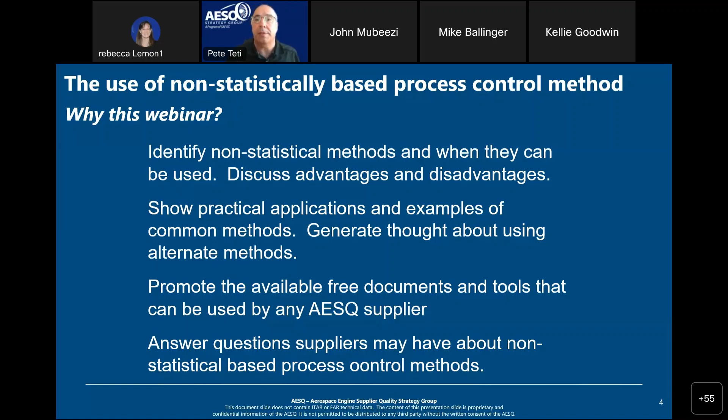RM13006 is the main subject here, and this discussion comes directly from that reference manual. When we put that together, it was a strategic decision not to make process control methods all based on just statistical methods, but also non-statistical methods, in particular poka-yoke, the Japanese word for mistake proofing. We'll be featuring that along with a few other techniques. So we want to raise the overall capability within our supply chain to understand how to drive the use of these process control methods as a way to mitigate high risk from a PFMEA, and how to write better reaction plans on your control plan. So control methods and the reaction plans go hand in hand together.

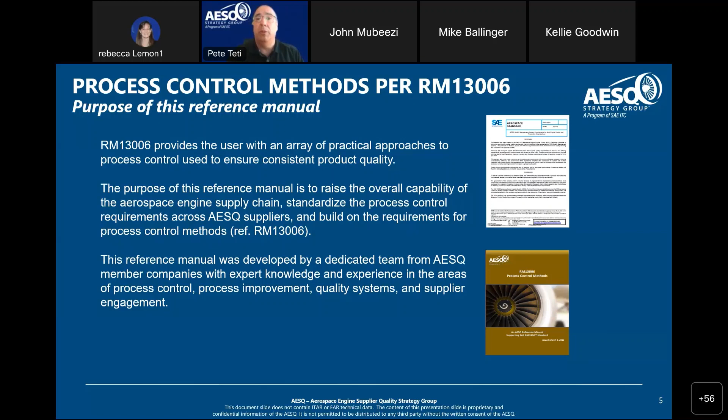Now, the reference manual was developed by a dedicated team of process control professionals that worked several years in compiling this excellent information. And along with this reference manual are many others available for free on the AESQ supplemental page website.

So what is the subject matter interest group? This is a group, as mentioned, of process control experts. We get involved in the AS13100 content when it involves process control. Reference manual content, we own that. We're in the process of looking at ways to improve that reference manual right now. So we get together on a regular basis. Every month we meet and we go over changes to the reference manual, webinar subjects, and what we could do to help the supply chain in this area. There is a community of practice that we sponsor on LinkedIn, where you can go on and ask questions and we can get back to you with answers.

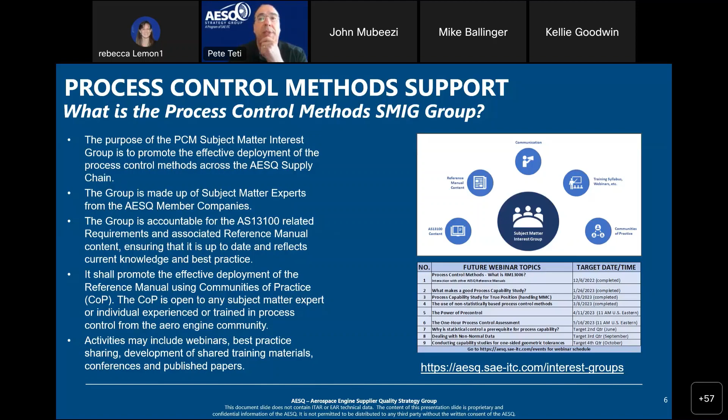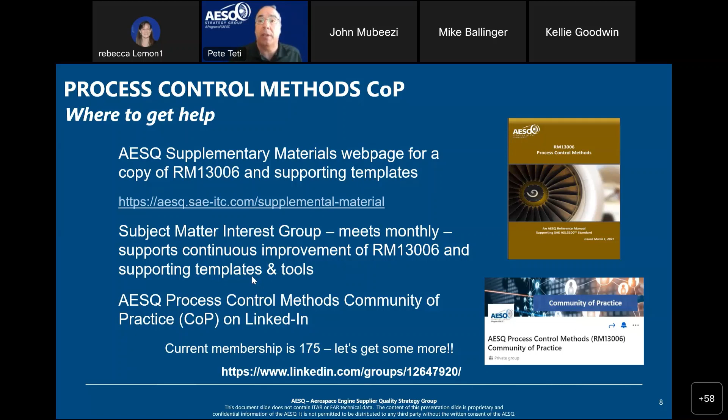So now we're going to take a walk through non-statistical process control methods. A lot of this is directly out of the reference manual with some supplemental visuals to help enhance the learning. So let's give an overview of the recognized control methods. What's error proofing or mistake proofing all about? Run charts with non-statistical limits, life usage techniques, visual process check and checklist, first piece check, and test piece evaluation.

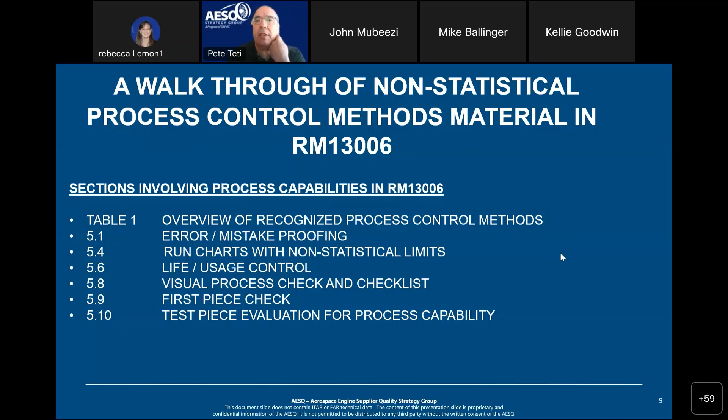I see my cohort in crime is now on, Paul Gorg. So he must have managed the technical difficulties. So I'm going to turn it over to him after this particular slide.

So what is process control? We've defined it here to be very strategic. And again, overall, a broad definition is the strategy employed to reduce and mitigate product and process risk. So it's something that results out of a design or process FMEA. Those are the tools to identify risks and also the control methods to help mitigate those risks.

Process control includes here the use of statistical and non-statistical methods. Again, these are to work to prevent and detect errors. And we know from design and process FMEA, the way it's structured, the columns are there for prevention-based controls and detection-based controls. We're going to key in on the prevention-based today. We'll talk a little bit about detection as well, but the initial discussion will be on error proofing, which is more driven towards the prevention.

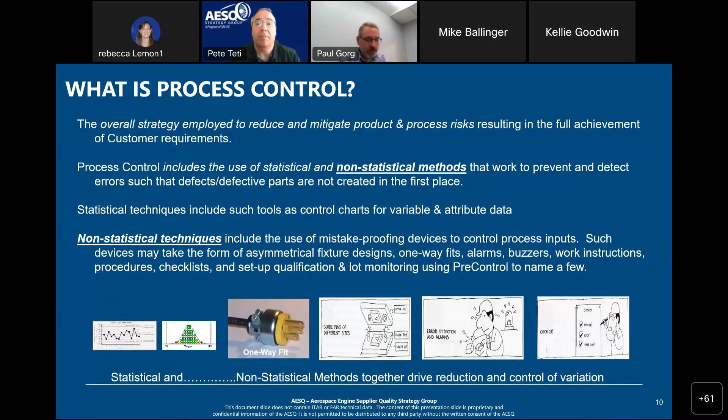All right. So we wanted to reference some of the materials that are out there. There's a lot of information on mistake proofing out there. What we're going to talk about is why non-statistical methods, when they're applicable to use, and then go through some methods and some examples. Poka-yoke, everybody's kind of familiar with that name, or mistake proofing or error proofing goes by a lot of different names, but it's not the only thing we're going to talk about today. But you can use this as a reference material and where to find it.

The goal is basically to prevent the cause of the failures and the defects. So that's what we're trying to do. Okay.

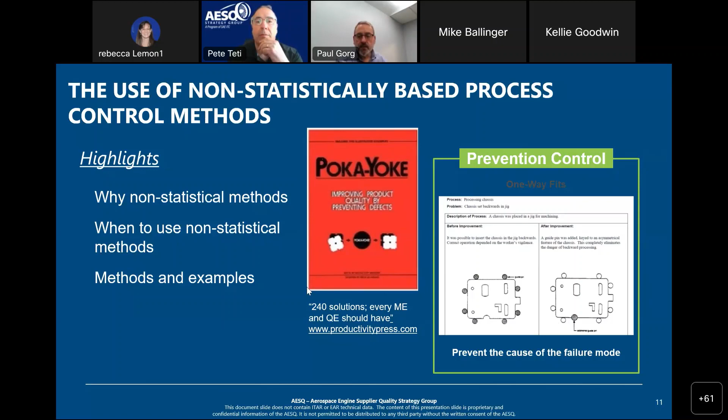So when to use process. First of all, when the process can be error or mistake proofed, when the elimination of the actual defect is possible. If the process does not easily lend itself to statistical methods, either the data is not normal, we'll have to go through transformations and all that kind of stuff, then it could be difficult to use statistical methods.

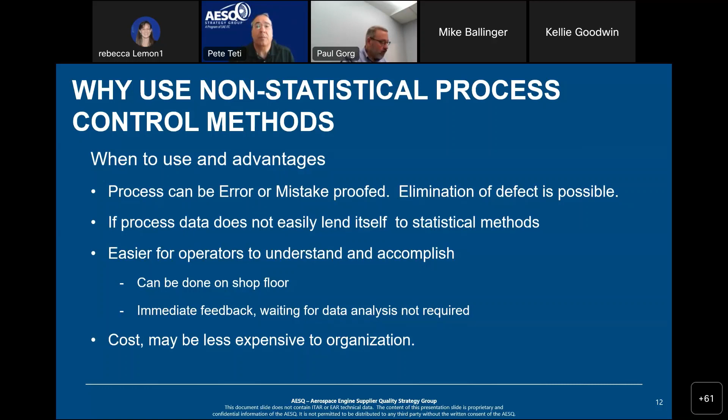The other advantage is it's easier for operators to understand and accomplish; it can be done on the shop floor. And the other advantage of it is to give you immediate feedback at the operation where you're doing it. You don't necessarily have to wait for data analysis, and it may be less expensive to the organization overall to accomplish. So it can be simple and fairly easy to understand.

When not to use: you may be in a situation where your process data is easily attainable. You have a nice normal process, it's easily collected, then probably your statistical methods may well be the way you want to go. Non-statistical methods are not going to give you process capability metrics if they're needed for the customer or organizational requirements. It's not going to give you a CP or CPK. You're not necessarily going to have that type of data if it's necessary.

And my typo is still there.

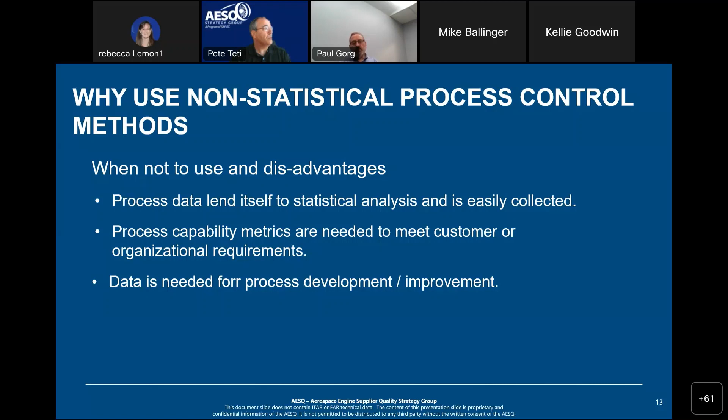Data is needed for process development and improvement. So in a lot of cases, the non-statistical methods are going to be more accept, reject, go, no go. So if you have a need for incremental data to look at process development and process improvement, it may well not serve that purpose. Next.

So this is basically showing that all this flows, right? The key goal of the process control is to help mitigate risk. Non-statistical methods such as mistake proofing are applied for the highest PFMEA risks. And what we're trying to make clear here is, you do your PFMEA, you generate your control plan. The control plan is based on your highest risk items from that PFMEA. And in a perfect world, your mistake proofing would be applied to your highest risk, meaning how do we eliminate the number one highest risk on that PFMEA from occurring?

Second would be SPC. Third would be, okay, let's inspect it, set targets. Fourth would be audit. Those might be acceptable for lower risk, but the higher the risk on the PFMEA and into your control plan, the more you want to try to generate something that actually stops it from happening. Like I mentioned in the first slide, there's a lot of different ways you can do this, and a lot of it is dependent on your process and what you're making, but the goal is to use your ingenuity, use your ideas, use your teams, figure out what can be applied, but to eliminate the defects 100% of the time.

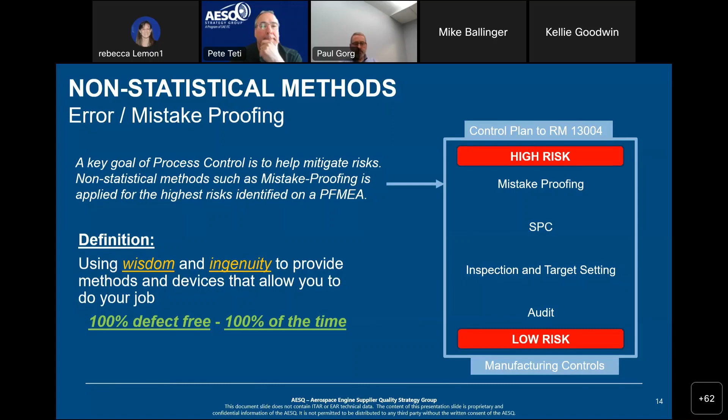So it's a little interesting in that there's two aspects of this. One is there's error or mistake proofing, but an error doesn't necessarily mean a defect, but the goal of the mistake proofing at the highest level is to eliminate that error, to make sure that error can't happen. So why does it happen? Forgetfulness, misunderstanding, lack of experience or skills. We're dealing with a lot of new people in our industry right now, a lot of training, lack of standards, trying to get things out fast, malicious intent, but that's extremely rare, and errors that lead to defects. Defects are not always inevitable, but can be eliminated by use of simple low-cost methods.

So mistake proofing is best applied where there's repetitive tasks that depend on somebody doing the same thing every time, remembering to do something. Those are more applicable areas for it. Ed?

So just a little credit to the father of it, this gentleman, Mr. Shingo, who's attributed to developing the method. Originally called, we've all heard it over the years, idiot proofing, but decided that was potentially offensive, so changed it to poka-yoke, which is to avoid inadvertent errors. And the target of it, and why we want to do it, is to eliminate QC inspection, to reduce costs, basically to make sure that you've eliminated the potential to even have the defect, so you don't even have to inspect for it. Go ahead.

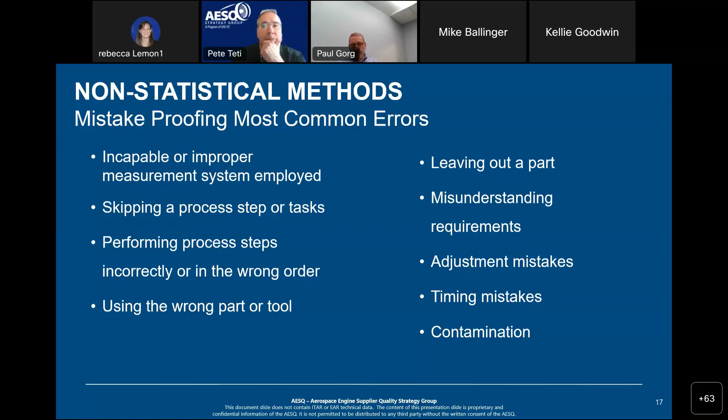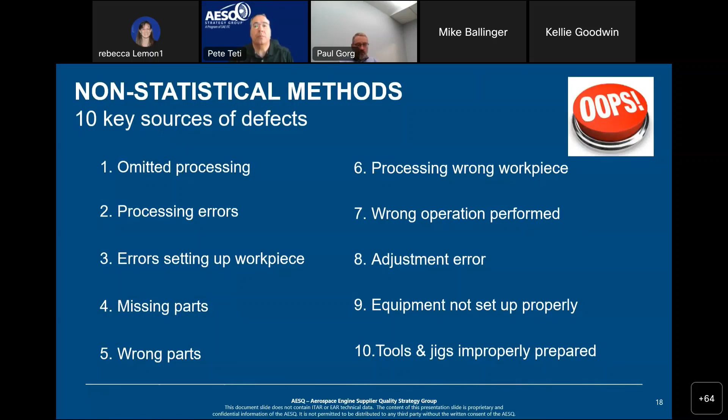So defects: omitted processing, errors setting up a workpiece, missing parts, wrong parts. You guys can read through the list, but these are the product defects. And again, sometimes the mistakes won't generate a defect, but sometimes they will. And if we can eliminate the error, or the mistake, then we're going to eliminate the defect. And again, we'll go into more levels on this next.

So error proofing can take 4 forms, and this is kind of a hierarchy. The best one is elimination, to design the product or process in such a way that an error is not possible, that you can't make the mistake. The second one is control, and you may not be able to stop the error from occurring, but you can make sure that it doesn't move any further through the process and that the defect is going to be 100% detected. Not quite as good because it doesn't actually eliminate the error from being made necessarily, but it will eliminate the defect from moving forward.

Number 3 is provide a warning signal. So it detects the defect or error and gives an operator warning. It doesn't necessarily stop it from happening, but it does give you the ability to deal with that and fix the situation. Facilitation is worse, and we're familiar with those. Those are work instructions and procedures and guidance, trying to increase the likelihood that we will catch the defect or the mistake before it turns into something worse.

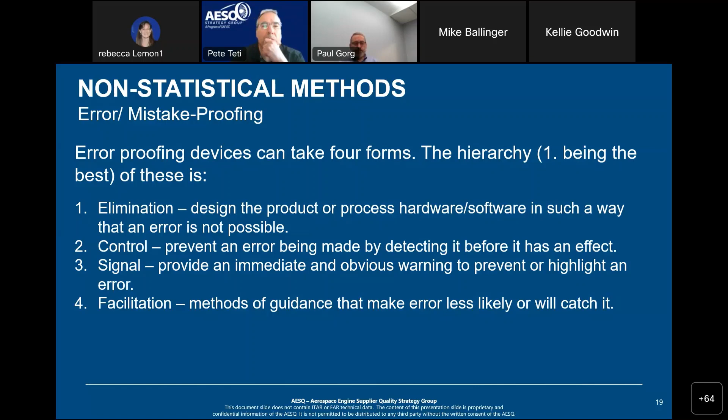And again, this is just another way to look at it, but the best one is level 1, which eliminates the mistake and defect from occurring at the source. So an example over there is the plug that you've all seen with the bigger tang and the smaller tang to make sure it only goes into the socket one way and guarantees polarity. Level 2 is mistakes are going to be detected. They're going to be determined and found, alerting the operator. Method 3 detects it and stops it from further processing.

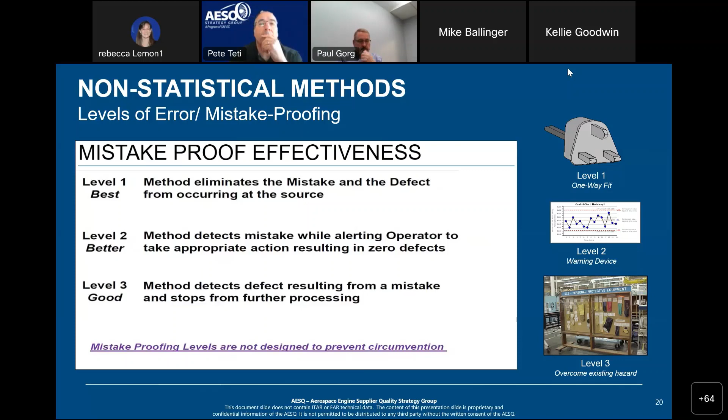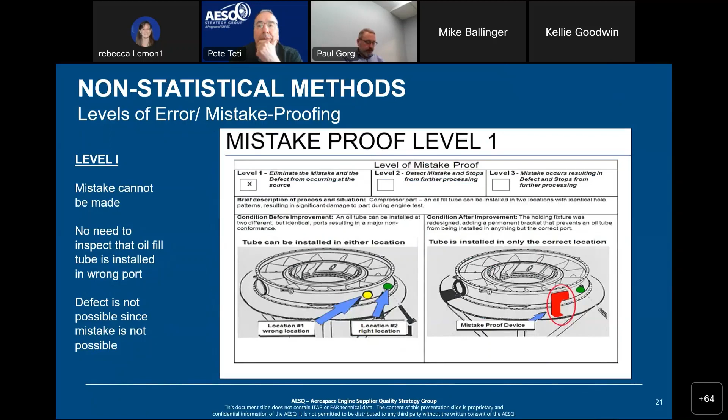The defect, again, is not possible. It can't be done with this type of situation. So this is a level 1. This is where we want to end up if at all possible. And with this, nobody has to worry about inspecting it or looking for it. It's guaranteed. The next example is kind of a level 2.

So in the example here, there's one screw that needs to be installed which is a different size than the rest because of the cutout at the bottom. The screw can still be put in, so the error could be made, and they could put the wrong screw in that slot. But the error proofing on level 2 is that if they put it in the wrong spot, the screw will not go in and will be exposed, noticeable, clear to the operator. So it doesn't necessarily fix the initial error, but it does fix the defect and make sure it will be obvious and visible and not be able to be moved forward. So this is a level 2.

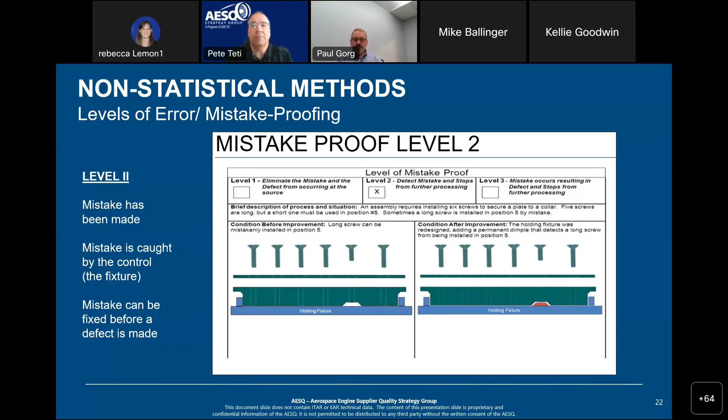And level 3 is, again, the mistake can be made and the defect can be made, but the jig itself is basically an inspection method that is going to tell the operator whether that defect was made. So it doesn't stop the mistake, it doesn't stop the defect, but it contains it, keeps it from moving forward, because that non-pierced part can't go through that pin. So it accomplishes the goal of not letting the part go forward. However, it does not eliminate the error or the defect. So still a good thing, but not the best.

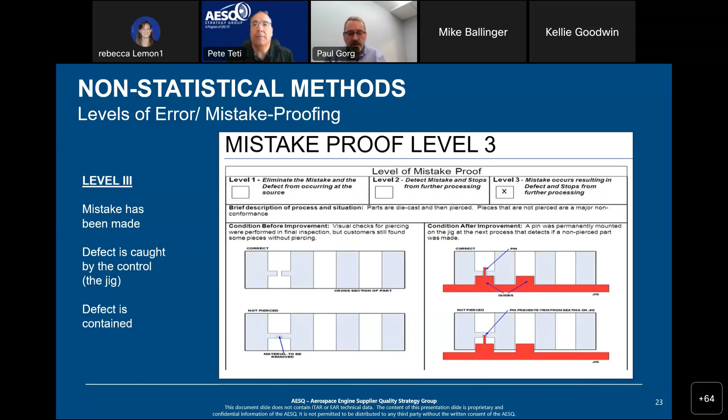So these are just some additional examples. A lot of us have dealt with fixtures and tooling where we put in different size guide pins, put in diamond pins, a diamond and a round and things like that, so the things just can't be assembled together incorrectly. They won't fit.

We have alarms that either light or sound or, in the best cases, actually shut down the machine if something is not within parameters, limit switches, so that the tooling is lined up. There's a lot of things here.

Lower level mistake proofing is going to be a checklist that's got to be signed off. And we'll go more into checklists later. But it's got to be signed off, got to be acknowledged. In the best case on checklists, there's two people looking at it, so you've got a double check. Anyway, I think most people have examples in their business of other methods.

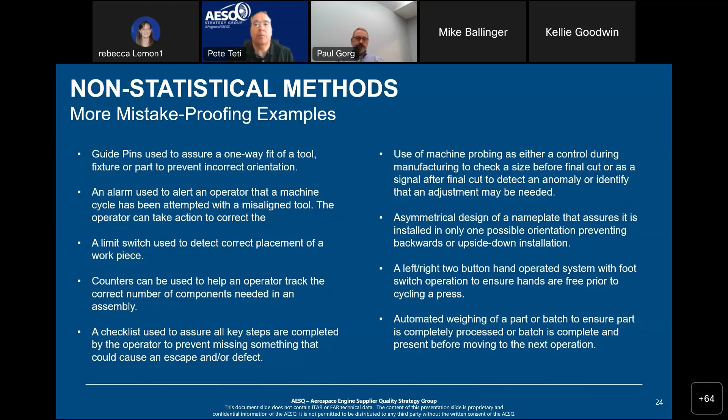Right. So control charts, non-statistical control charts. In our business, I'm in the casting business. We use a lot of run charts because, particularly in our investing or shelling process, it's an ongoing chemical reaction.

In the case of a run chart, you can have set points and limits in a defined plan, so that when you get to that set point, actions need to be taken. So this is going to lend itself to where you don't have a statistically valid process. In our case, we're making chemical adds, water adds on a shift basis. So it doesn't lend itself to doing a statistical analysis or doing control charting per se with calculated limits.

So we define set points, and when we hit those set points, there's an adjustment that needs to be made. There's a lot of opportunity for control charts in non-statistical. The advantage of these is they're pretty easy to use. A lot of times the operator can enter data.

It's a clear limit. When they hit that limit, then there's a defined reaction plan that, okay, this is what I need to go do, and then retest the data. If I'm back within my set points and where I need to be, then I can continue processing. So it's a convenient thing to do, simple, easier to understand.

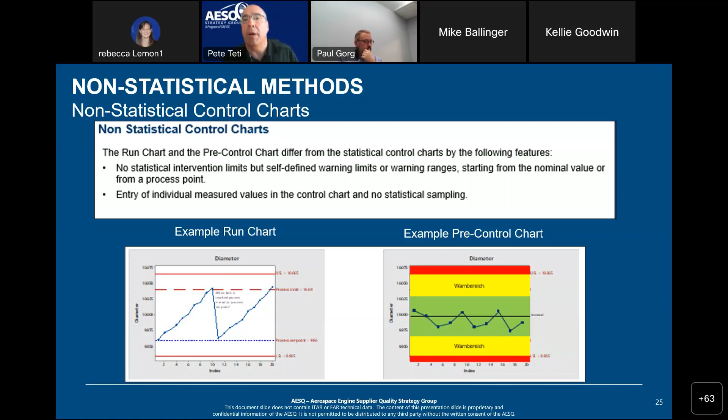So some general advantages to some of these types of control charts, particularly the run charts. No prior statistical knowledge required for application. They're fairly easy to use. They're fairly straightforward. You have the data, you have a set point, you have a reaction plan. Like I said, it's simple, operators can do it.

A lot of times it's best applicable to systems and processes that are easily measurable, right? You can measure them with a micrometer, or we use a viscosity measurement, or something the operators can do and they can enter.

Disadvantages: the set limits, warning limits are based on an assumption. Now it's important that assumption be based on data and some knowledge. They won't do any good for you if you set a limit that is going to yield bad product and doesn't actually control your process. So you have to be smart about where you set your set points, what they mean. It does take some knowledge.

It doesn't yield anything in terms of what you're actually getting for variation. You're just going to see typically a run up and an intervention, and then it's going to go back down. It doesn't really lend itself to getting a lot of data for corrective actions.

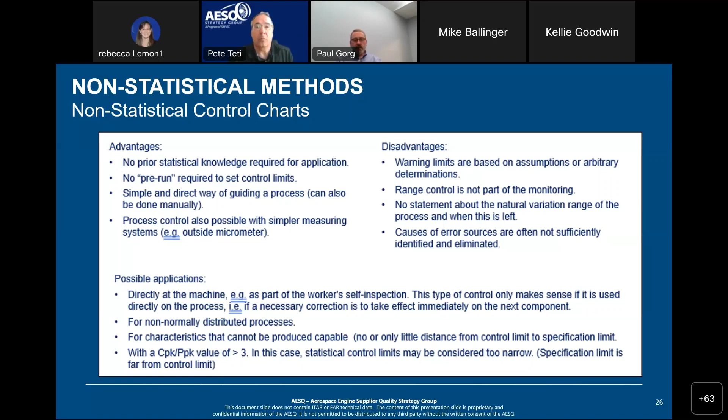Okay. All right, so life usage control is another one. I think a lot of us are familiar with this. A big example is we all change the oil on our car at a certain time and point. Many processes have a factor that changes over time or over the number of pieces made. This basically is defining where that condition is that's going to adversely affect a product or process, and then we place controls on those.

So typically, for age, if you deal with coatings or adhesives or that type of thing, there are age limits on those. There's pull-by dates, you can only store them so long, or they have to be at a particular temperature. Maybe a number of parts produced. Some tooling is going to need to be replaced after a certain number of parts, certain runtime. Again, once it's open, the use-by date, weights. Sometimes there's max weights on parts, and that helps you determine if you're within where you need to be.

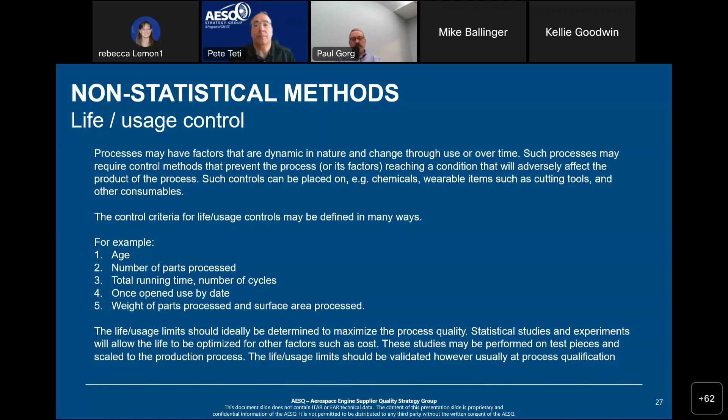Yeah. So examples: cutting tools have a maximum operating life. Tool life is recorded in a machine readable chip. In that world, sometimes it's calculated in hours or time, and then the cutting tips are replaced. Peening operations are based on total equipment running time, how much uptime on the machine, how long it's run, and then when the media needs to be changed is determined by that time.

Ideally, you'd want an automatic shutdown on the machine so that it stops at that point. Not just a warning light or something like that. In a perfect world, you'd actually have a hard shutdown.

We do a lot of etching in my business. There's so many months or days that we can use an etchant. It's also measured another way later on in test pieces. But when do we need to control that? When do we replace the acid? When do we replace the concentration?

Sometimes this stuff is easier just to set a date and do it routinely, rather than go through all the effort of determining it, like in this example, every Monday morning we're going to replace it. Or you may check it, get data like I'm talking about, and then decide whether you can reset and continue to use it, or it needs to be changed, removed and thrown out. So just a few applications.

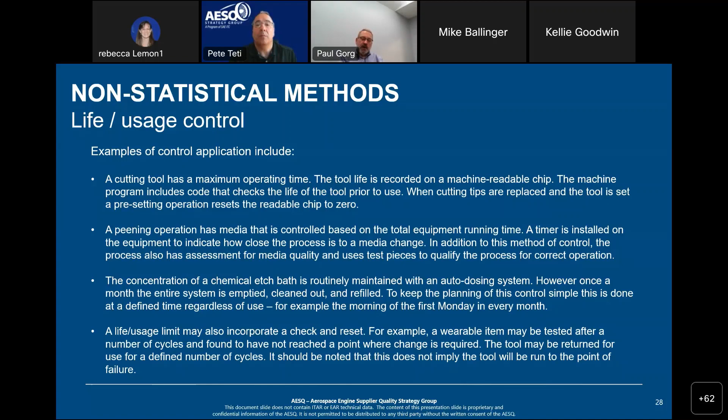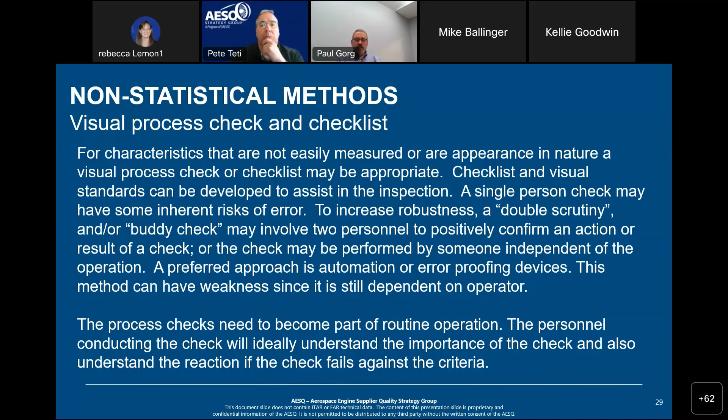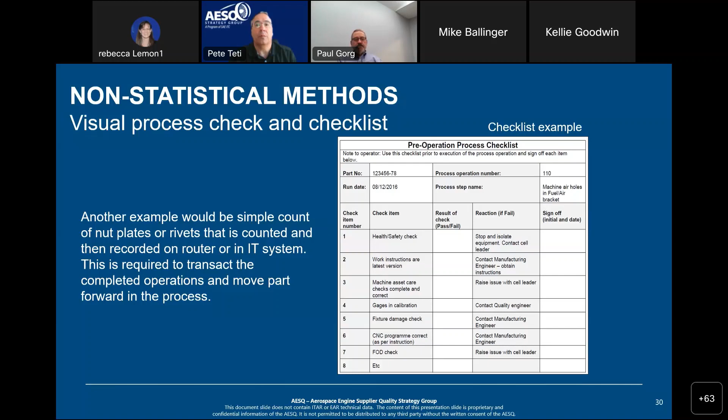So with people going more and more to electronic systems and away from just paper routers, that is a good opportunity nowadays. Okay.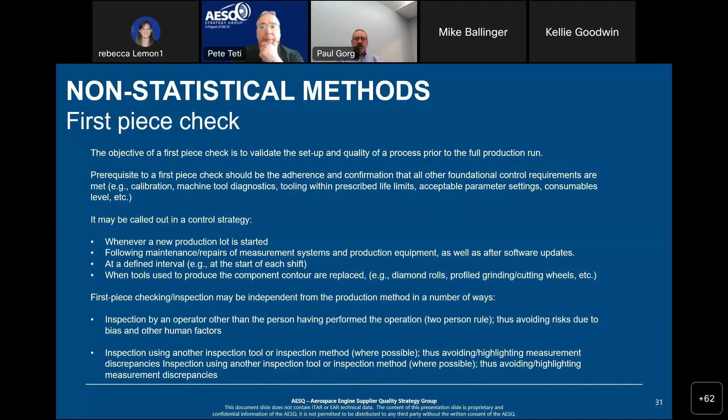And some of the best cases is if you can use a different inspection method or a different tool, just in case you've got a measurement problem or a tool problem. And again, going back to the previous checklist, you can use a similar sort of checklist on this, where that first piece inspection is documented, checked off, and acknowledged in the WIP or EPMS system, so that you can verify that was done. Okay.

So examples: first piece check with a known adequate person who comes over, checks it, looking for 50% of the tolerance. And again, it's important to have defined limits as to what your action plan is. If it's not within those limits, an adjustment is made, an additional piece is done, and that's checked. If that is within the limits and able to go forward, then you keep going.

Processes that have an upward drift, again, first piece check. Again, important to have a limit in terms of what your action plan is. If it's inside those limits, then you keep proceeding. And sometimes on this, you may need to have a periodicity. You may have to say, okay, I'm going to do the first piece, and then I'm going to do another check at the 25th or the 50th if you're really seeing a drift.

I guess one note on this is example 2 uses two other non-statistical methods to set the defined limits for the first piece. So they're using a run chart to look at it, or a tool wear study for life. So a lot of these tools can be used together and lend themselves to each other.

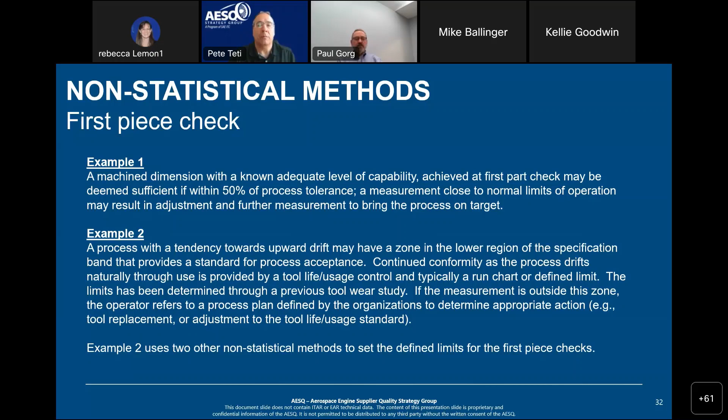We do hardness testing after heat treat to make sure that the parts were heat treated properly. And surface hardness testing for shot peening to make sure that was correct. In my industry, everything runs with test bars for mechanical property testing, again, to verify mostly that the heat treat was done properly. We pull coupons at melt to verify that the chemistry is done properly. In etching processes, there's test coupons that are used to determine the etch rate, or even in electrochemical polish as well. So there's a lot of use in this.

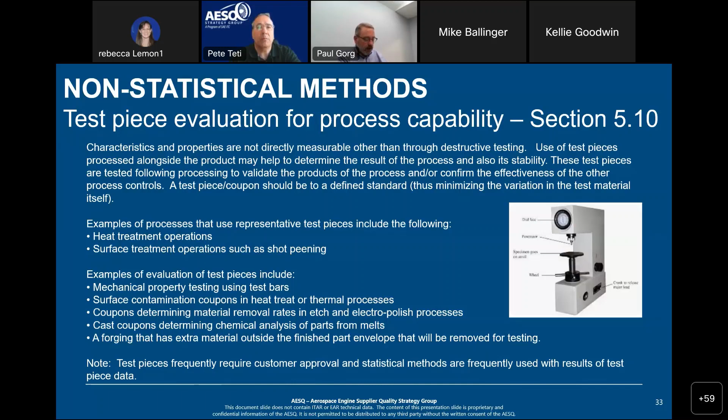And again, a lot of times they require customer approval, and a lot of times statistical methods are used with the test piece results. We'll run CPKs on our test bar results, and we'll look at chemistry distributions and see if we need to adjust anything. So common in our industry for a lot of applications. And again, this is something from my industry in terms of we pull test bars and 1/4-inch rounds and have customer defined mechanical properties that are required, and the part has to meet these properties. A lot of times your test piece data will go on certifications and will be requirements for shipping product.

So I guess the biggest thing for me, again, is there's a lot of different non-statistical methods, and they're going to be very much applicable to what you're doing in your business and your product. So don't be afraid to suggest something, use something. The biggest thing is to have the data back it up: why you're setting those limits, why you're using this method. But I think there's a lot of value in them. For the most part, they're easier to understand, easier for people on the shop floor to do. Data can be collected very quickly and acted on very quickly. So I think it's an important part of our toolbox. So with that,